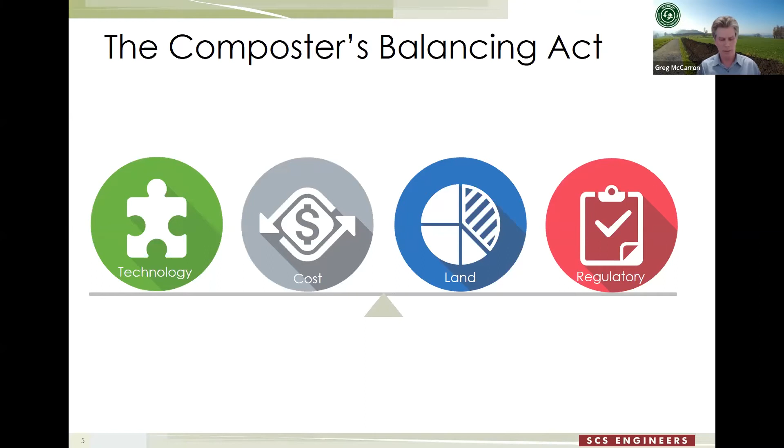So we're going to talk about two case studies today. In the first one, the two issues on the right-hand side are more dominant, more heavily weighted. So those were the key issues that we had to address. And then in the second case study, the issues on the left, technology and cost, were the bigger issues that we had to address.

Delving into the technology considerations a little bit more, technology is a key item in composting, but one distinct advantage that composting has versus other organic processing operations, as well as really other solid waste operations, is that it can work at a wide range of scales, both from a low technology perspective as well as a high technology perspective. So the compost process, that biological process, is very robust.

In any kind of system, we're trying to get as close to the ideal conditions for the bacteria and the fungi to do their thing. But if we're not quite there, the process still works. And so there are a lot of different technology options that are available, and they all work. But depending on which one you select, we're trying to get it to an optimal state. So as we go through the slides here, we'll touch on some of these technology differences and compare and contrast the two case studies that we'll present.

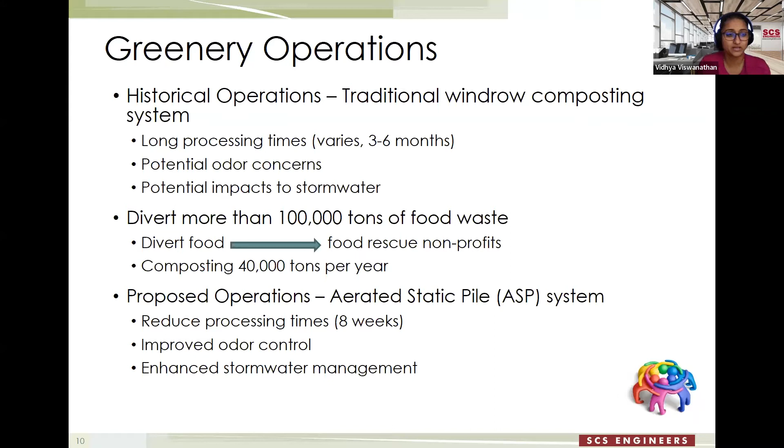And for the composting system, because of their extensive experience with windrow composting and the other pilot studies they've conducted, the city elected to move forward with what is known as a covered aerated static pile compost system, which reduces processing times. I have 8 weeks on the slide, as you can see, compared to the 3 to 6 months, provides significant improvement in odor control, and also creates enhanced stormwater management. I'm going to pass it on to Greg to share what an ASP looks like.

Okay, thanks, Vidhya. So yeah, picking up off of what Vidhya was just talking about, and first thanks to our friends at Sustainable Generation and Gore for this graphic. But this presents a covered aerated static pile system. Here, the focus is on the middle part of the photo, where it says step 2, step 3, step 4. So that's really phase 1, phase 2, and phase 3 of the compost process. So the dark green is phase 1, the light green is phase 2, and then the tan brown color is phase 3.

So the key thing with this type of system is that we can process a lot of material in a relatively small footprint of land. And so that was a key consideration for San Diego, is that they had a land restriction. So importantly for San Diego, they were doing the composting on top of their landfill, but still they wanted to keep the footprint small. So they went with this system, which again provides a lot of throughput with a small footprint. The other key thing is the odor control aspect.

So the first 2 phases of this employ the Gore cover membrane system. So we have a lot of process control as well as odor control with this type of system.

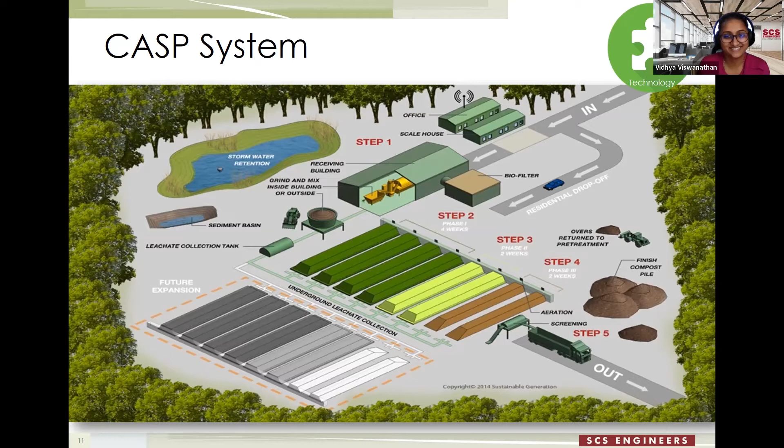Greg and Vidhya, somebody asked the question with regards to how many acres is the San Diego site. You might be covering that in a bit, but that was one of the questions that was asked. Okay, I will be covering it in the next slide. That's coming up in the next slide or two. So yeah, good segue. I guess we'll hand it back over. Thank you, and thanks, Bob, for that question.

So yeah, just a little bit about the City of San Diego covered aerated static pile project. The city put out an RFP for a design build project, which was awarded in January of 2018 with SCS as the prime. Greg already mentioned Sustainable Generation, who were the technology provider. And the project overall cost was about $4.49 million, with part of the cost being offset by a CalRecycle grant.

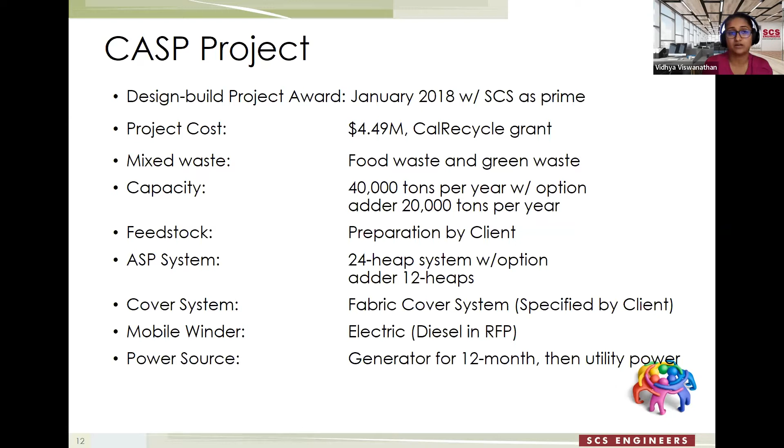The composting system is designed to accept mixed waste, that is food waste and green waste. And everybody just has to remember that this was all in preparation for SB 1383. The initial throughput was 40,000 tons per year, with an option to expand and add another 20,000 tons per year. Feedstock was to be prepared by the city.

The ASP system, the equivalent of the 40,000 tons per year, is a 24 heap system with an optional adder of 12 heaps. The cover system was a fabric cover system, which was specified by the client. And along with the fabric cover system, there is a mobile winder, equipment that helps place and remove the covers. So for those who are familiar with landfills, think about these as tarps for the composting heaps.

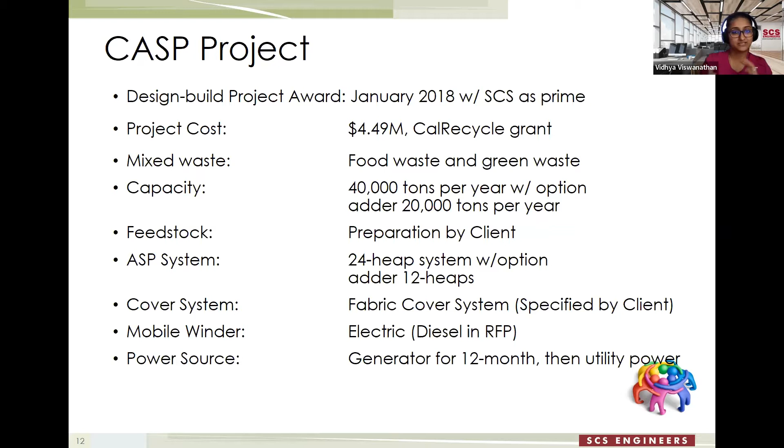The interesting thing is the RFP required a diesel mobile winder, and we were able to provide an electric winder. And as you'll see down a few slides, the benefit of it. And finally, power source. Initially, the project was to be run on a generator for 12 months and then to utility power. The city's utility power comes from landfill gas to energy plants. And so they were trying to go full renewable energy and fully sustainable with this composting system.

So anybody who's considering siting a composting system on a landfill just needs to keep in mind that there is the landfill gas collection and control system, and those monitoring requirements don't go away. So we were able to marry all these different disciplines and come up with a layout that meets all their needs.

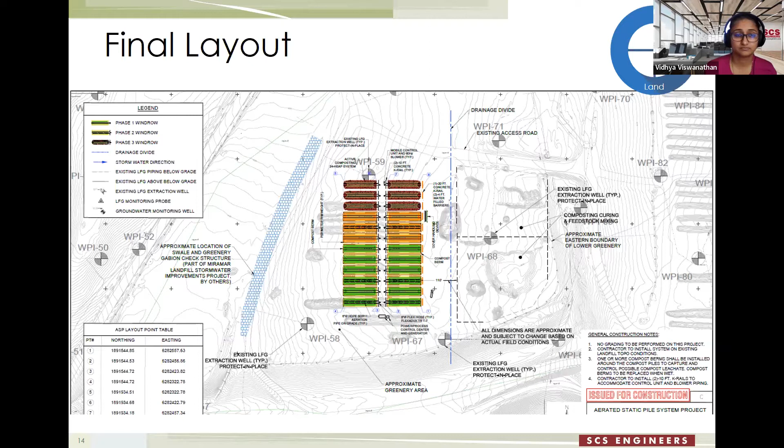And I can't remember right now off the top of my head what they did prior to the ASP, but their whole concept was, with SB 1383, we're going to get an increase in the amount of materials that come through the gates towards this composting system. So they were trying to maximize throughput, which is where the technology came into play, that the covered ASP allows us to do that, use a smaller footprint and process more materials.

And what ratio are you using relative to food waste to the other materials that are in the compost? The system was designed for a 50-50. And I do remember that we started out with 25-75, and then we tested 50-50. But then the pandemic hit and they saw very little food waste. So 2022 has been interesting, to say the least, for the city.

And somebody asked a question about, can this be sited on a closed landfill? It can absolutely be sited on a closed landfill.

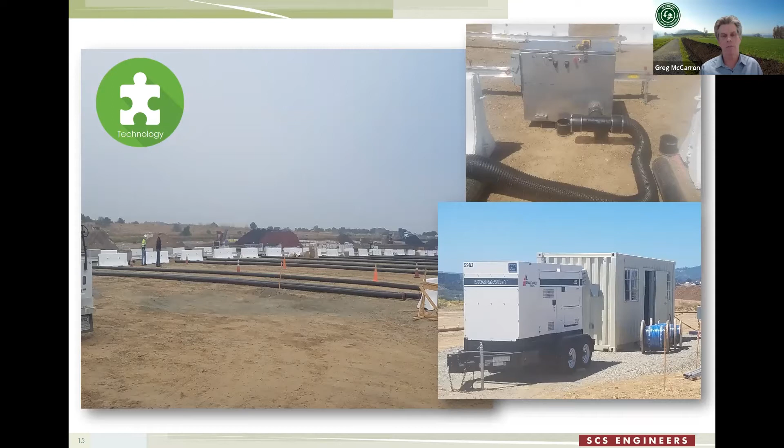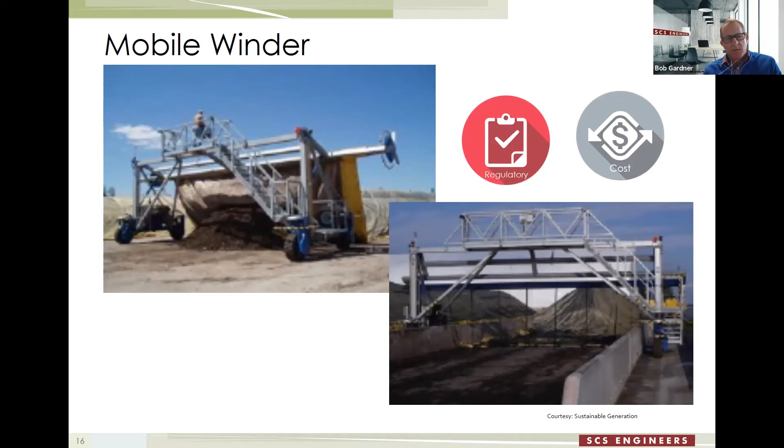So on the actual construction of the pad itself, Vidhya and Greg, in terms of the integration with the interim cover, were you basically using a gravel pad that you constructed? How was that pad constructed, and how did it integrate with the interim landfill cover? So on this one, Bob, we've seen things changing. I just want to remind everyone that it's a rapidly evolving regulatory environment. When we did this project, I think they already had a few feet of cover, so they didn't have to do anything special. The site did the preparation for us, so we didn't have to do any grading. In fact, that was one of their requirements.

But we have done other projects since this one, and we've seen the regulators ask for more information, and we've had to do permeability tests, some coring, soil tests to ensure that it meets the permeability requirements. So you didn't need, in this particular site because it's on a landfill, any concrete pad? We didn't. Well, we've done projects on other sites that are landfills where it's the exact same thing, but the regulators asked for additional testing. So just because this is how it was done here, we have to be mindful of the fact that it's an evolving regulatory environment, and the regulators could ask for more.

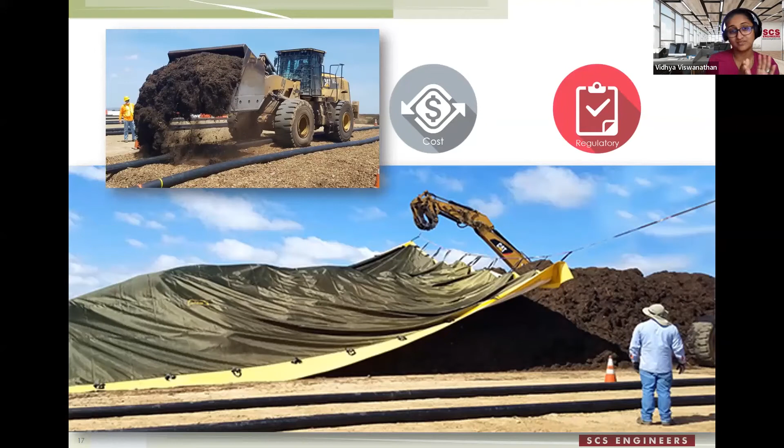So with the food waste, that's where you start seeing VOCs and ammonia. If it's green waste only, you're not going to have as many odor concerns. So if it's food waste, you have to move quickly. And otherwise, you will need a full-on organics intake facility. And that's not this type of a system. That's a very different system.

So just wrapping up San Diego with one last photo slide here. One of our key factors being land, this is an example where the compost facility is on the landfill, as we've been talking about. But we need knowledge and we need to work around things like the landfill gas system, which is shown in the upper right-hand corner of this slide.

And the other thing that we need to provide for an ASP type system is electric power to run the blowers. And so there are possibilities, and we have been involved in a project in California where we've provided that electric power through solar panels. So that's pretty neat technology that can be deployed as well.

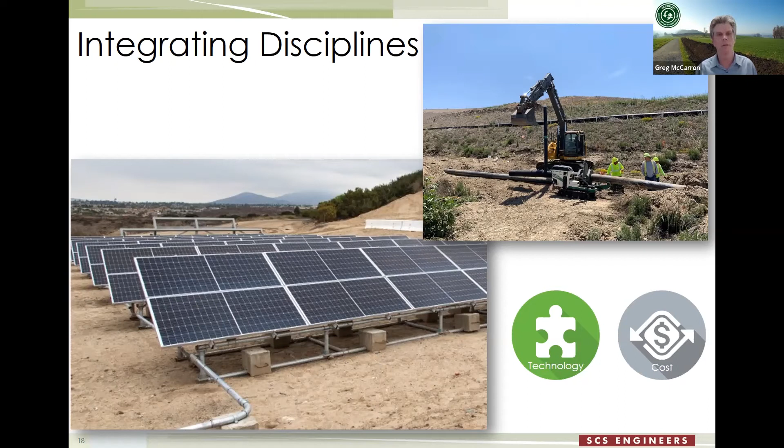Here's a summary, just to wrap up the San Diego project. Some of the cost numbers, I think we're consistent there based on a clarification that Vidhya gave on the total overall cost of about 4.1 million, and the state grant of about $3 million. Here, the pros with this approach, again, with the key factors being land and regulatory: we had a land restriction, and we met that with the compost technology that was deployed, which is able to process a lot of material in a relatively small footprint.

Odor concerns were abated through this system, and stormwater impacts were minimized as well. And finally, costs were minimized by the on-grade construction, so avoiding concrete construction if we had to do this off of the landfill footprint or at some other site; that's a significant cost for these kinds of projects. One of the cons, as Vidhya alluded to, is that being on an interim cover part of the landfill, there's a possibility that the system would have to be relocated in the future due to landfill expansion.

And that's among other reasons why concrete wasn't used, that we didn't want to put all that material and cost into the project and then have to get up and move some years later.

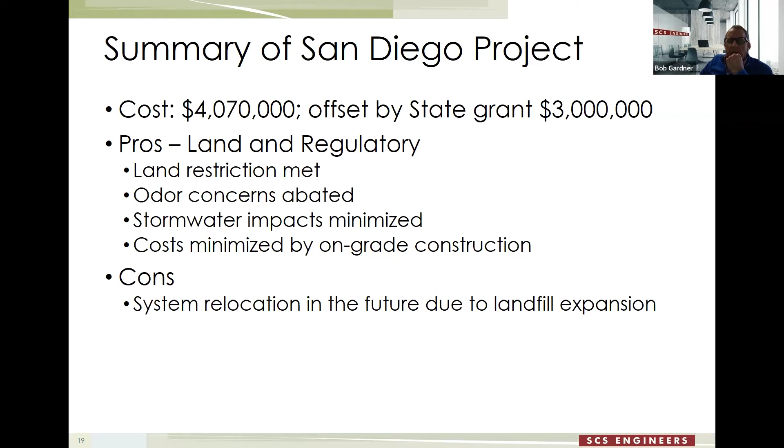One last question. I know we got to jump onto the Vermont case. Is there any example, relative to your experience, Greg, of using this system for biosolids? Yeah, this system and other types of compost systems have been and are being used with biosolids composting. So certainly viable to use this kind of system for biosolids. Okay.

Okay, we're going to move across the country to Vermont, and in the spirit of comparing and contrasting, Vermont is pretty much the least populated state versus California, which is the most populated state. And the other key contrast is, well, California gets all the press about their SB 1383 and organics diversion. Actually, it's in Vermont that as of close to 2 years ago now, July 1st of 2020, all food scraps in the state have to be diverted from landfill and waste-to-energy, including residential. So it's, whether you call it the most restrictive or most enlightened state, it depends on your perspective. But Vermont is leading the way with organics diversion.

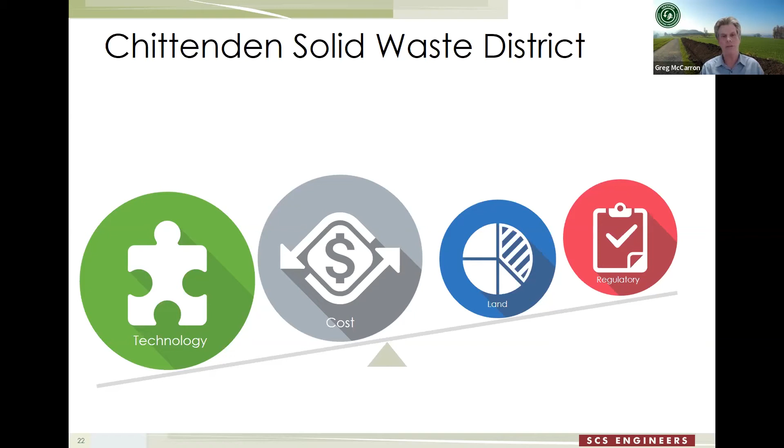And again, in contrast with the California project, here our technology and costs were weighing down on us. Our client, in this case, is a public entity, Chittenden Solid Waste District, or the district, I'll call them. And so we'll focus mostly on the technology and cost, but land and regulatory aspects are certainly a part of this story as well.

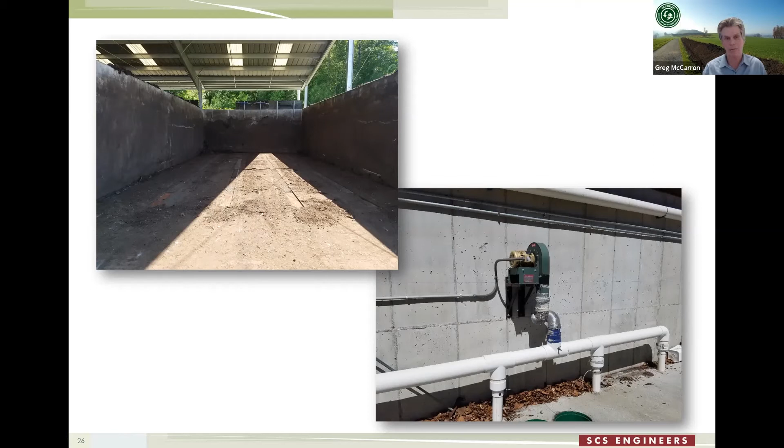And so the material is moved from a phase 1 bay over to a phase 2 area. And again, the residence time here is a similar 2 to 2.5 weeks. So the whole ASP process is about 4 to 5 weeks versus what we saw in San Diego. They had a little bit longer phase 1, phase 2 process of about 6 weeks total.

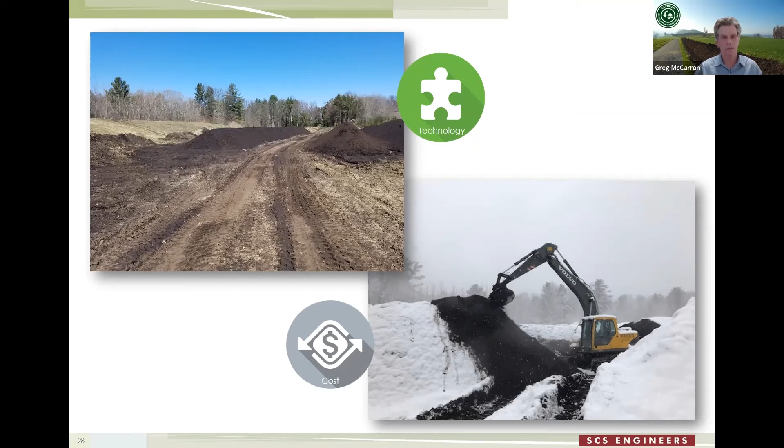And so, one thing that we do with most every compost project when we come in is we put together a process flow diagram and a mass balance or a volume balance. So that informs us as to how much room ultimately we need. So it's not only a mass balance, but also a volume balance. So how much volume do we need at the front? How much do we need in the compost process? And how much room do we need for storage?

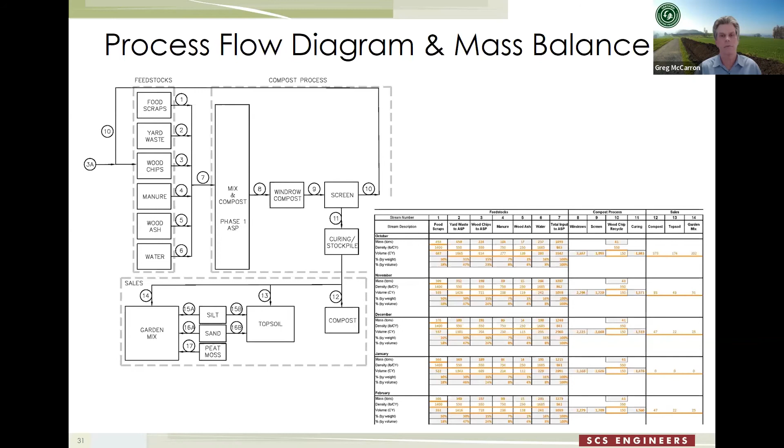So ultimately, we came up with some site improvements. And so, we decided in concert with the district that we would move to what we call a hybrid compost system. So keeping the phase 1 and phase 2 ASP process up front, but going with more of an active, traditional windrow turning operation in the middle part of the screen. And so that's what you see here on the left-hand side.

So we have now a windrow pad that was graded properly and constructed properly. And then also on the right-hand side, the sales and blending area, again, with grading and civil site improvements. And of course, with that, stormwater improvements as well.

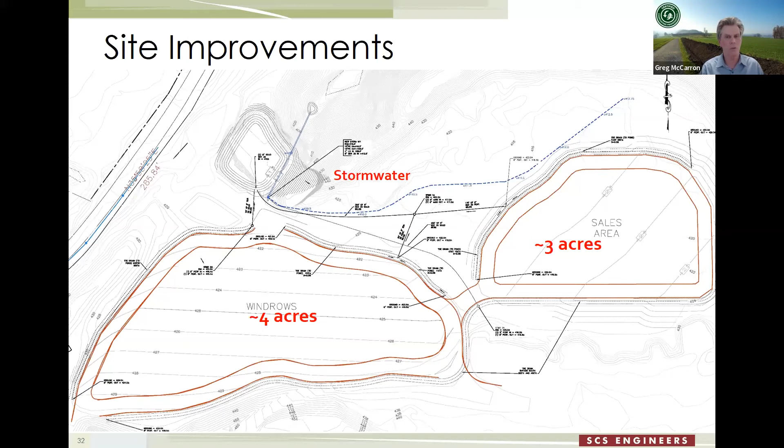Just Greg, one of the curious questions that was asked was, before this modification, when they were doing the mixing, did they mix the snow just back into the compost for moisture? Yeah, that's right. We own and operate a compost turner in New England, and in fact it's beneficial. We often like to turn the compost piles either during the rain event, or the snow just gets turned right into the compost, and so it provides moisture, which is in most cases beneficial to the process.

So just a quick snapshot of the civil site construction. Again, fairly traditional civil site construction, doing some grading work, stormwater improvements. We put down geotextile and overlaid that with 12 inches of stone for the windrow pad, and I believe it was 6 inches of stone for the sales and blending area.

And then beyond the so-called compost process technology, there's a certain amount of fixed assets, which we saw in San Diego and we saw here as well, with concrete pads, aeration pipes, blowers. But a key part of any compost facility is the mobile equipment. So here, what the district decided, assisted by a state grant similar to San Diego, is they went out and purchased a windrow turner. So here's a photo of that, also showing a snow shot as well.

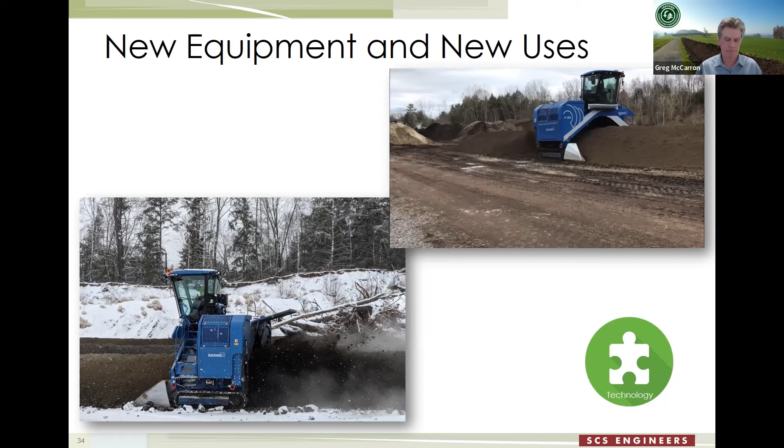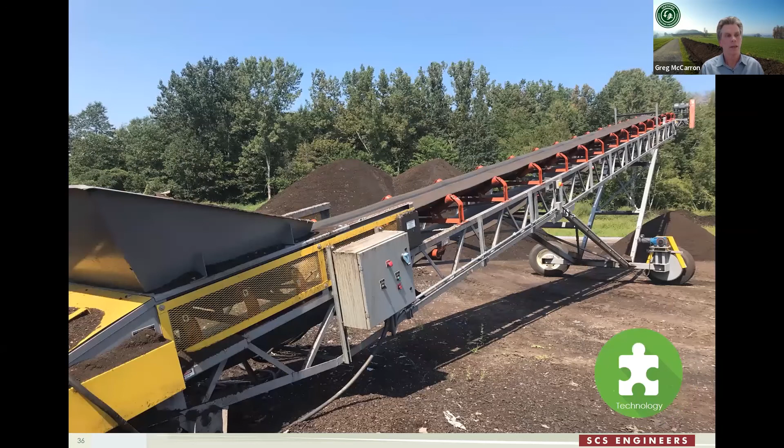So in summary, for this project in Vermont, you can see the total cost here, and then the amount offset by the grant. And our pros, again, we're focused on technology and cost. The compost yield has improved. They're making a high quality compost in a shorter amount of time. And there's lots of cost savings they've been able to realize through the turner, saving on labor and maintenance of equipment, including the stacking conveyor, and I should mention the dump truck as well.

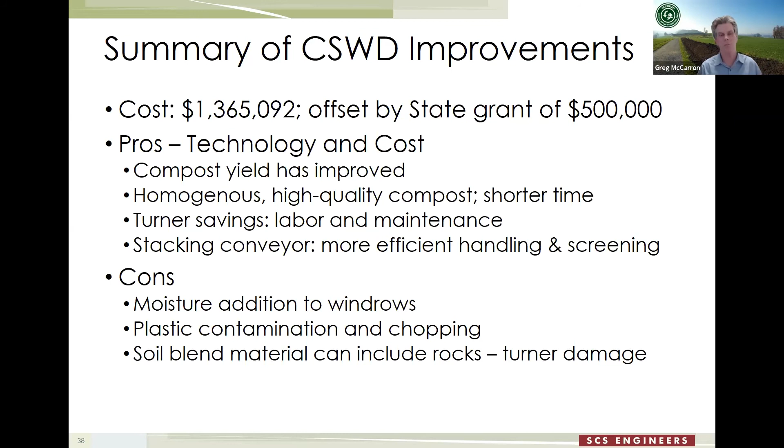Some of the cons they're dealing with now with the windrow turner is that at certain times of the year the windrows dry out, and how to get moisture back into those windrows efficiently, and then plastic contamination, with the mechanical action of the turner chopping up the plastic somewhat. So they've got to deal with screening, airlift separation. So there's ever-evolving improvements they need to make at this particular operation.

So in conclusion, we just wanted to show the interplay between these different factors, and especially with compost facilities, your individual situation and site specifics really will dictate the selection and development of your compost facility.

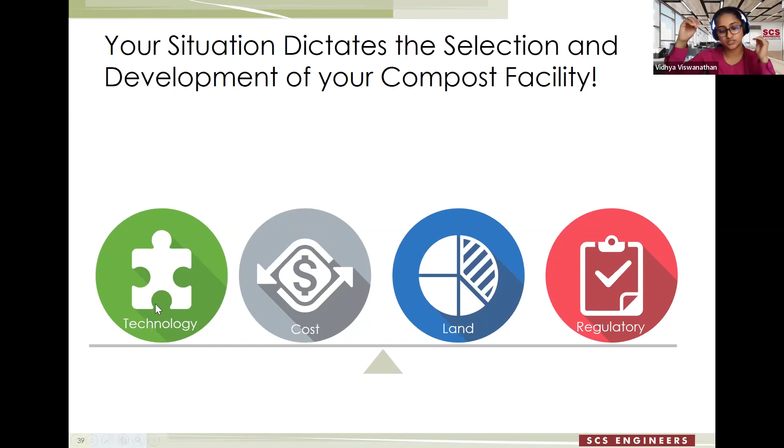And the other thing to recognize is the way that the piping works. There is a plenum layer at the bottom of the pile. So the idea is that the plenum is what distributes; the pipe perforations just provide the air into the heap, and then it's distributed upwards uniformly throughout.

Greg, I think you may have gone through the listing of the typical costs associated with some of that major equipment that you have there. Can you maybe review that again? Oh yeah, actually I meant to bring that up, and I don't think I did. So the compost turner was about $500,000, maybe a little bit less. The dump truck was $150,000, and the stacking conveyor was about $40,000.

So those are obviously the equipment cost components. And then I think that the total cost was pushing 1.4 million. So the balance of that money was the civil site improvements. And would you say that in terms of the general feel of the place and the operations, much improved? I got a sense that they're pretty happy with the upgrades. Yeah, very much so.

I think they've more than doubled the area of their all-weather surfaces, and so they're just so much more efficient. The dump truck has helped out tremendously. You've got a 20-yard truck moving material as opposed to a front end loader bouncing down bumpy dirt or gravel roads with a 4 or 5 yard bucket. And the compost turner has cut their process time down quite a bit.